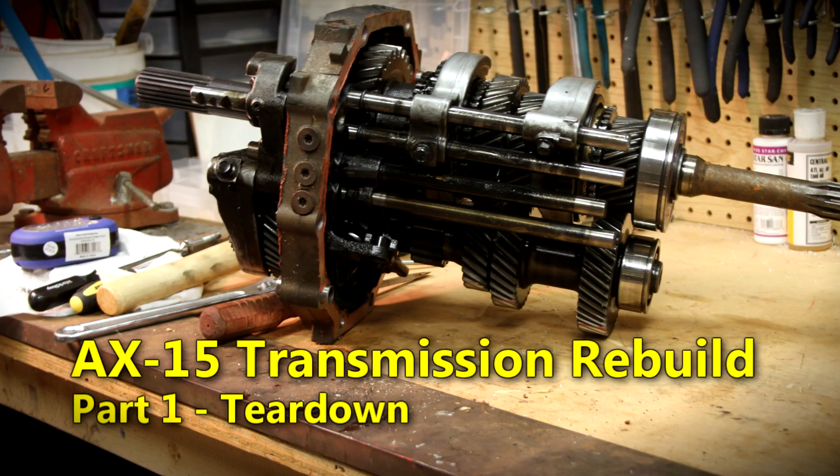Thoroughly enjoying fall weather, this Jeep with the top off, and I can't imagine taking it apart quite yet. So I'm going to start working on some of the major components.

I've gone ahead and sourced a transmission from Craigslist, and I've got an engine. We're going to actually jump in the shop right now and start working on the transmission. We're going to tear it down, look at what's wrong with it, rebuild it, put it all back together, and get that thing ready to be put in the Jeep when the time comes. So let's head back to the shop and get started on that transmission.

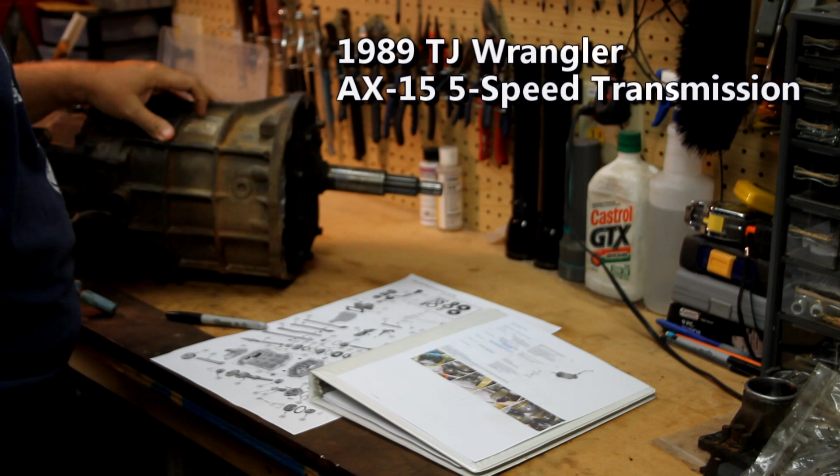Okay, I'm going to rebuild this AX15. It's out of a 1998 TJ Wrangler. It had 180,000 miles on it. Bought it on Craigslist, paid $160 for it. The guy dropped it because he messed up the reverse gear. He actually did open it up and took some pictures. He's very open with what was wrong with it, and it was exactly what I was looking for -- something to purchase and then rebuild. I've gone ahead and bought the master rebuild kit, as well as the reverse idler gear, which I know is broken, and I went ahead and bought the fifth gear. There's an upgrade to the fifth gear, so we're going to apply that as well.

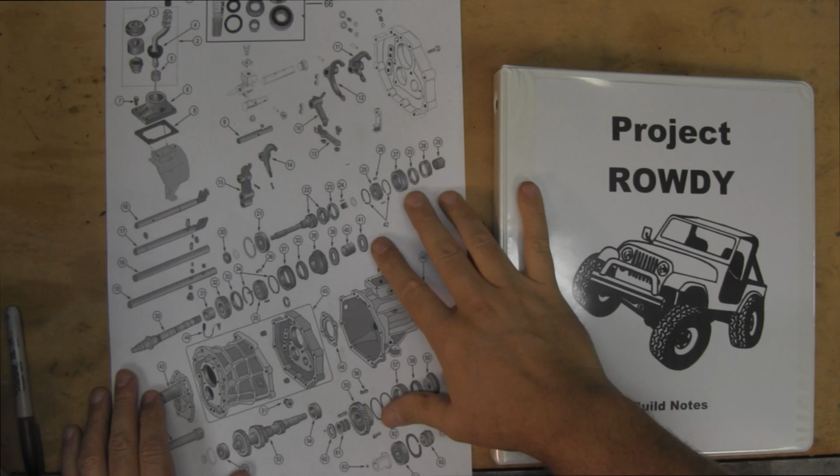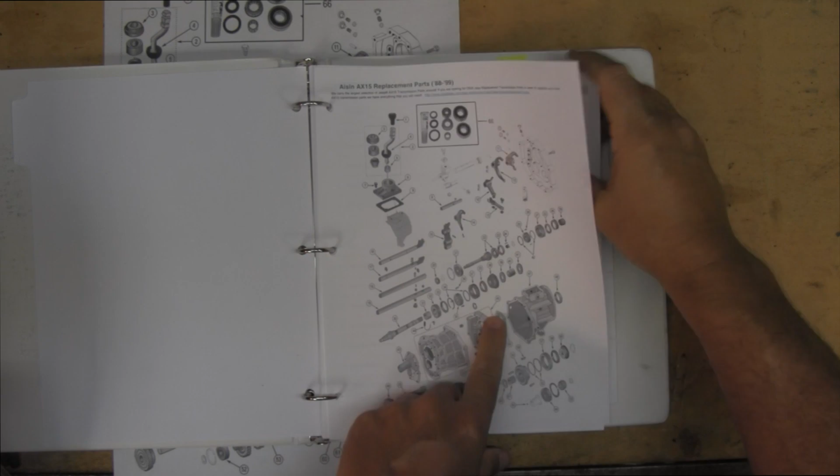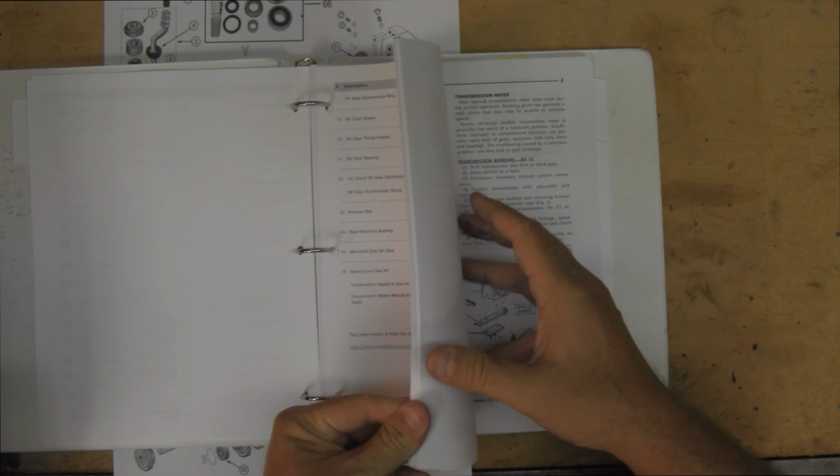Before we crack this open, let me show you some of the documentation I'm going to be following -- the repair manual, as well as some diagrams and other research I've done. Let's go over that. I found this nice exploded diagram of the transmission, so I'm going to have that on my wall for good reference, and I've replicated it. Here's a normal size version of it, but it's got part numbers, part descriptions, and prices in case I need to find things that are wrong as I tear this apart. We'll be able to figure out how we're going to need to replace that. Here's the main thing -- this is the service manual, and it goes step by step how to do this. I've read through this several times.

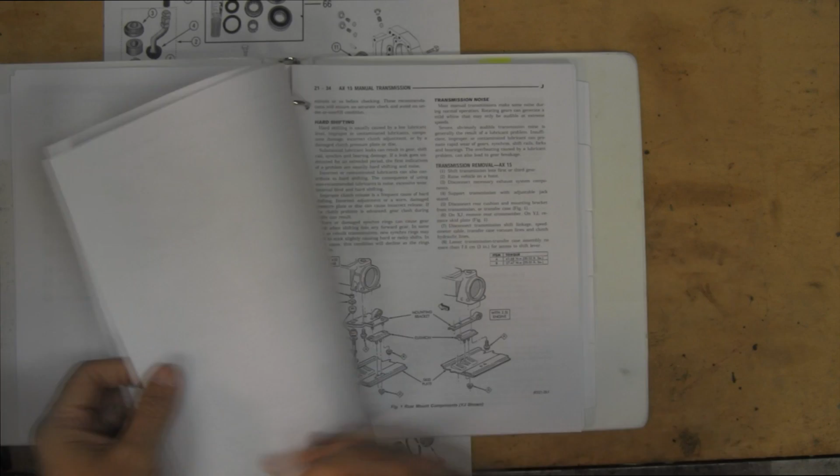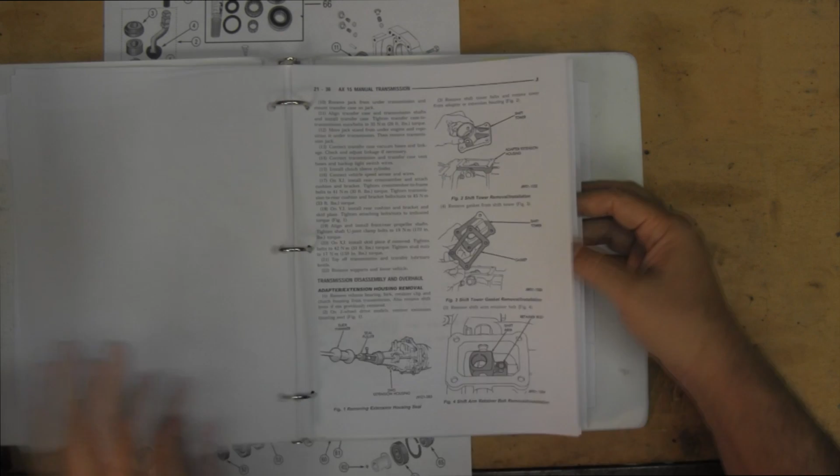I've got some recommendations -- I know we're not supposed to use GL-5 gear lube anymore. It hurts the yellow metals, specifically the synchronizers, so we're going to use something different. But interestingly, there's actually some things that are incorrect in here, so I'll go over those as I hit them.

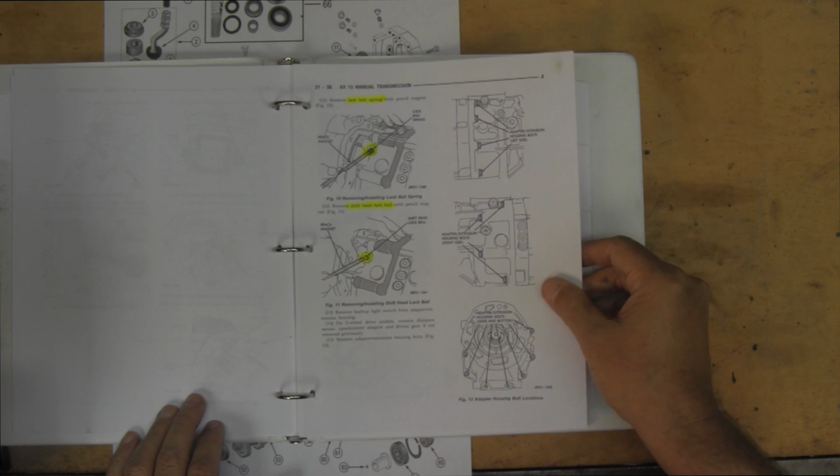This reminds me, there's going to be three things that I'm most worried about when I'm doing this. There's detent balls that will just fall out of nowhere, so you've got to expect where they are and how to deal with those as they show up -- I've got those highlighted in yellow. The other thing is just the order in which things go, and that's why videotaping is really important. I recommend videotaping anything you do, that way you've got a good record of how it came apart.

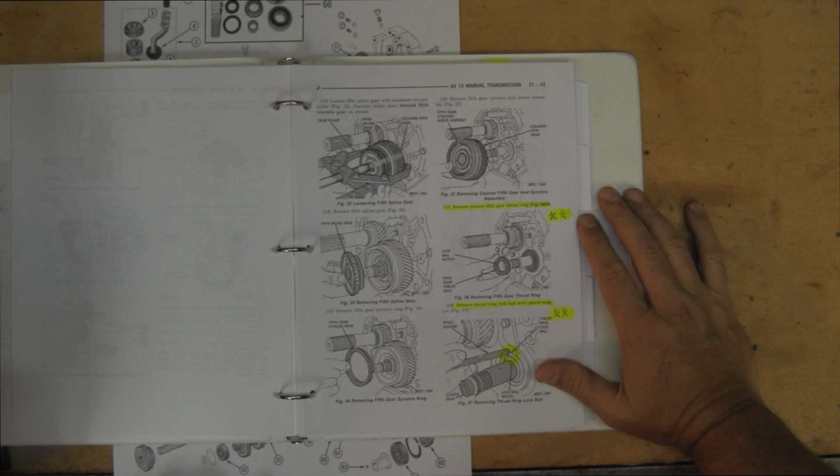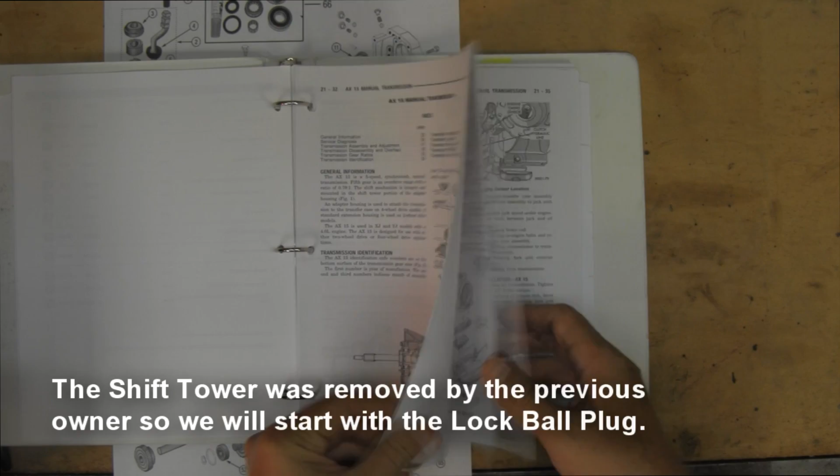The other thing I've got is I've actually got two shops in my local area that specialize in rebuilding these transmissions, so if I get into trouble, I'll be able to get their help with anything I need. So anyway, let's get started. We're going to follow this step by step and start taking it apart.

Alright, first we're going to take off this lock ball plug. Spring.

After further investigation, it doesn't appear the lock ball is in there, so I'm going to order that and/or keep investigating, make sure it's not up in there, but I've looked with a flashlight.

Now we're going to take off the adapter housing bolts. I'll look at these, make sure none of them are a different size. So that one came out of the top. Take them out. Yep, that one's longer. So just these two here were longer -- we'll make a note of that.

Okay, I'm going to put these in a special place to mark them, so I make sure I get the right size back on here from the rebuild kit. I'm just going to hang them in this spot. I'm going to take this off in case it's binding on something.

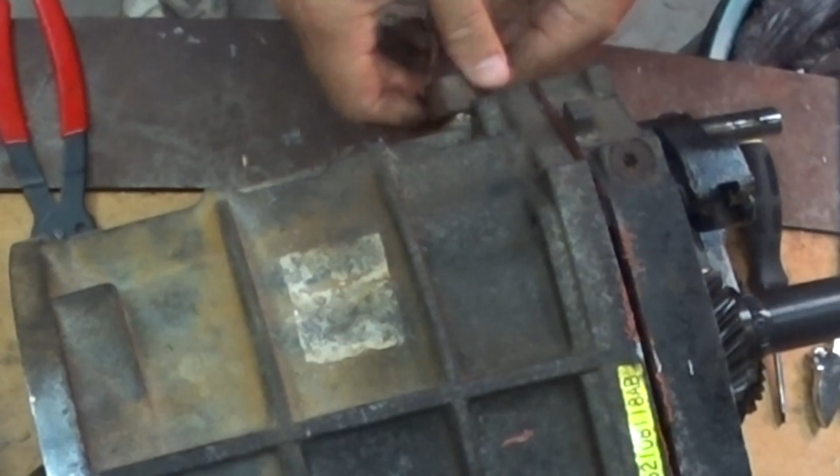Pretty loose -- this is the reverse switch. Can you help me hold?

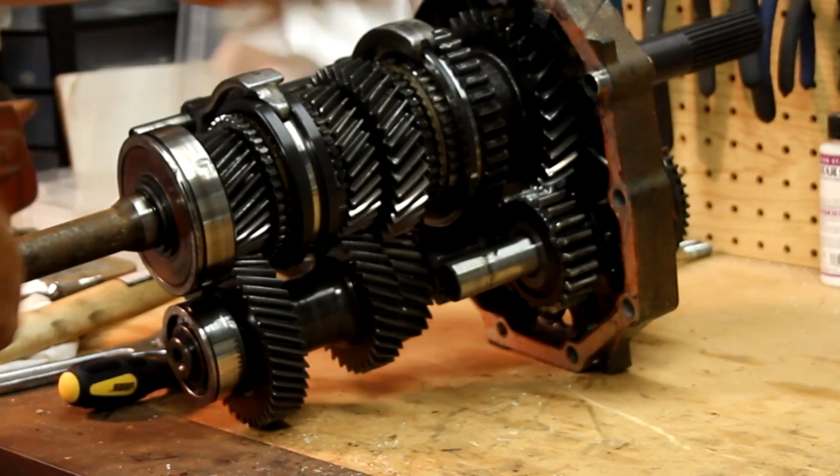Alright, let's look at the actual problem of this original. Was this reverse idler gear? Yeah, you can see where the teeth are gone. And my big concern is what that marries up to, make sure those teeth are okay. Here's the mating gear, and it's got enough issues that I'm going to have to order that too.

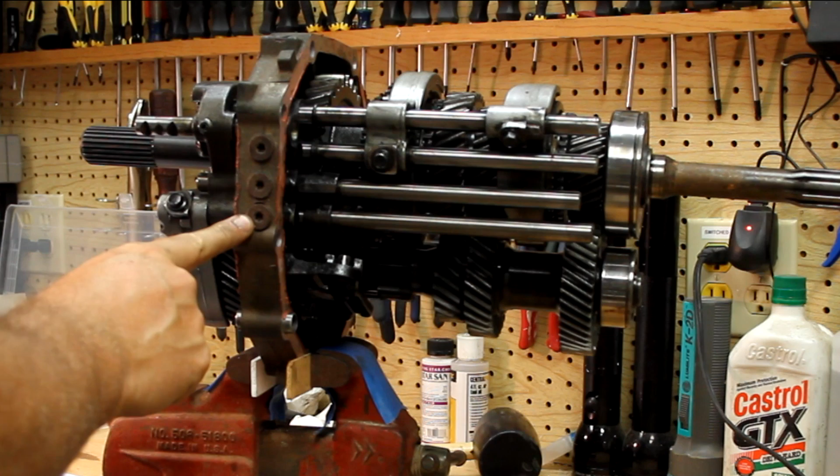Alright, next I got to take off these 3 detent cap covers. There's going to be a spring and balls under here, so we've got to be careful with the balls. We'll probably have to use a magnet to get those out. So let's get these broken loose. These are pretty rusted looking, so this may be a little bit difficult.

I'm going to sit them on the bench in order, then I'm going to look at them. I believe they're all the same. There's 3, 2, 1. Using a bolt to extend it because it's narrower, but it'll still go in and grab the balls. There's 1. There's 3. And there's 2. So since those are all the same.

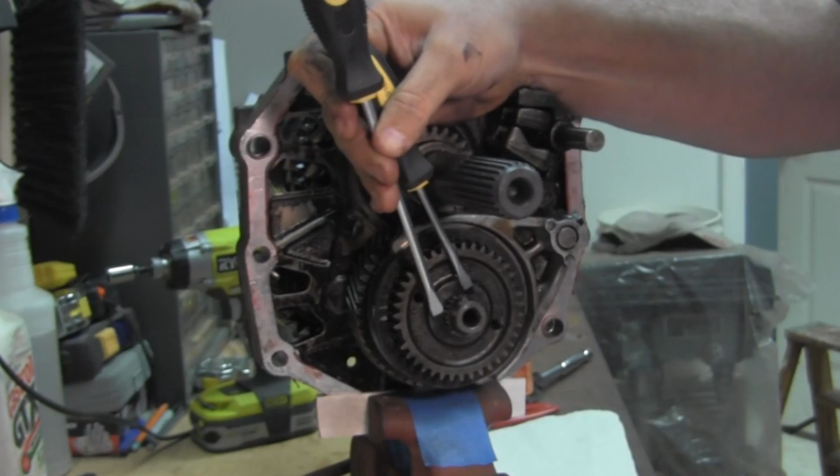Alright, next here is 5th gear. We're going to take off. There's a C-clip right here we're going to take off. Okay, got the C-clip off.

Okay, so back on the gear side, we're going to take off this little spring clip. It's an E-clip.

Okay, and now we need to take off these 2 bolts for this reverse shift arm. Remove the shift arm and shoe. Okay, so that just pulled off. All that looks pretty good.

Okay, so next I'm going to take off this 5th gear shift fork. Should be able to pull this out enough to get this fork off. Alright, so I'm going to mark this as 5th, and I'm going to put an arrow to the front of the transmission. Front of the transmission is that way.

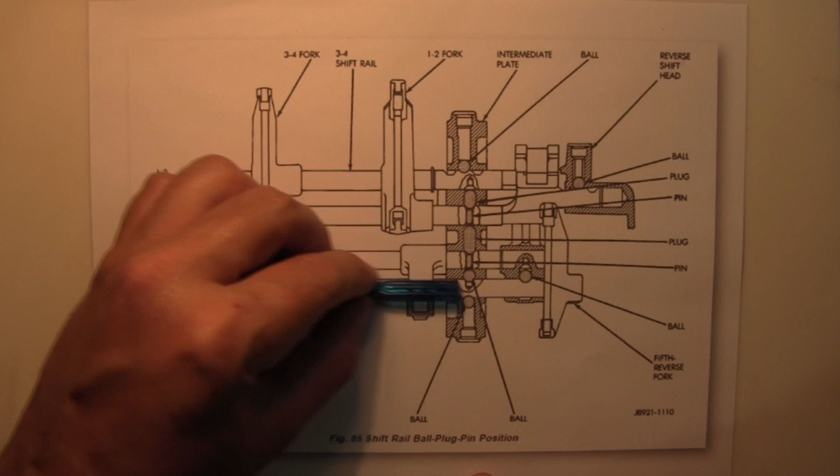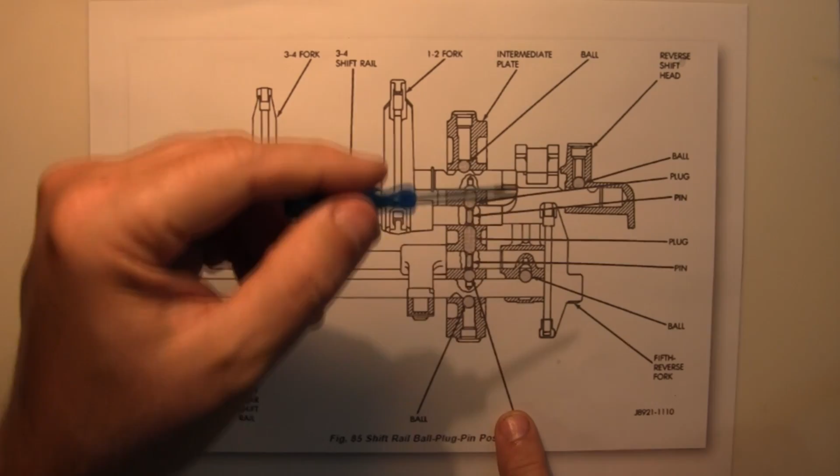Okay, hold the fort. Let me explain what just happened and what should have happened. A minute ago, we removed the 5th shift fork by pulling the 5th shift rail out a little bit, and then we removed this piece. The second part of the instructions, which I did not read, said the next step was to pull this shift rail completely out. I didn't do that. If I had, this ball would have dropped out. It's this ball that we're having a problem with. In normal circumstances, the ball wouldn't be there, and this reverse shift head rail we're trying to pull out now would just slide right out without any problem. So that's why I'm having the problem I explained.

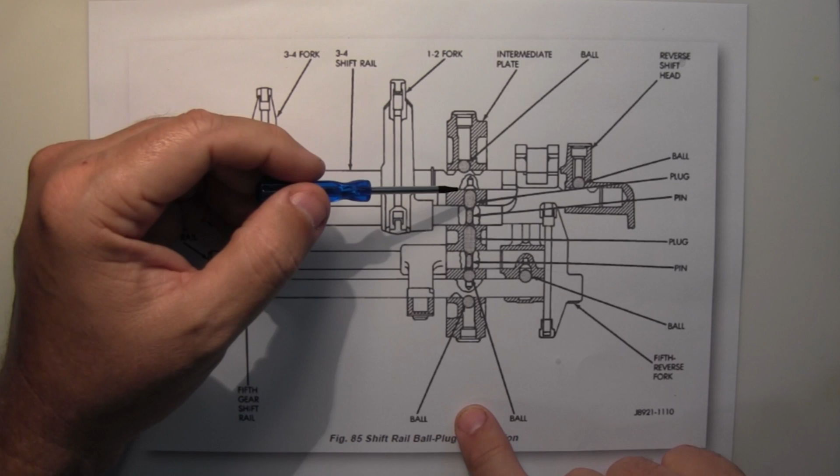But while we're here, this is really cool stuff. This is kind of the inspiration why I wanted to rebuild the transmission, to learn how this stuff worked. We always hear about detents, and detent means to detain or to hold or control. The detent system, this whole section in gray, is our intermediate plate, and in there there's basically a channel. It's got a bunch of balls, pins, and plugs that help maintain and track which gear you're in, and they basically allow you to shift into one gear, and once it's shifted into gear, it locks everything back up, so these rails cannot move left or right, so another gear cannot engage.

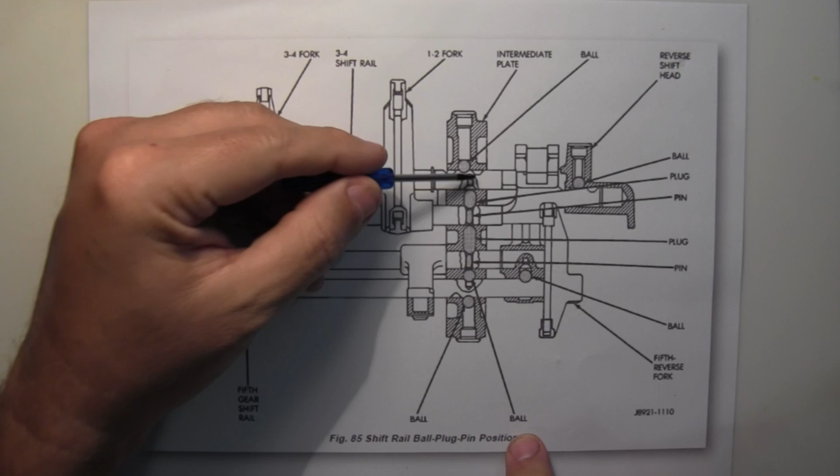If we look at the top, here's one of those caps we removed. This would represent the spring, and here's a ball. So this is a spring-loaded ball. This is the 3rd, 4th shift rail, and it attaches to the 3rd, 4th shift fork. 3rd gear being on this side, 4th gear being on this side. If this rail moved to the left, we'd be engaging 4th gear, and this ball would drop down into that little trough, and that spring-loaded ball in that trough would help keep the transmission in 4th gear so it wouldn't bounce back out.

When you shift this, right now these shift rails are all in a neutral position. The transmission is in neutral, and so any one of these 4 rails can move left or right. Once you shift one of these rails, any one shifts left or right, these pins and plugs shift up or down accordingly, and they lock the remaining 3 rails so they cannot accidentally shift into a gear.

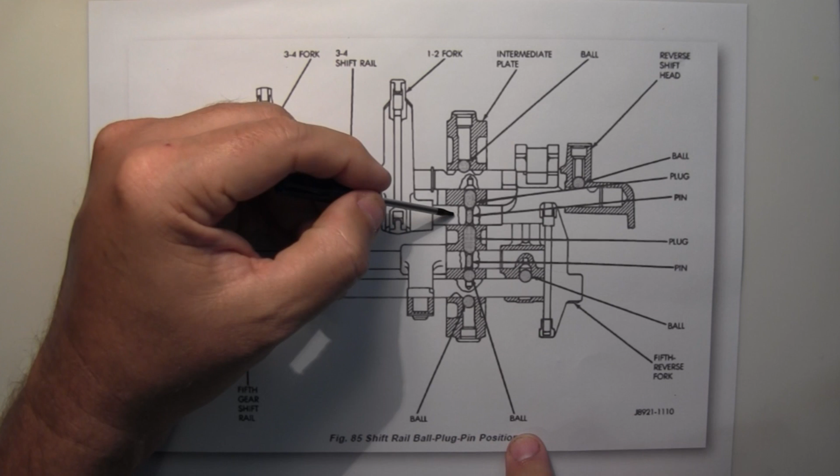In the intermediate plate, it's a bigger piece because they can drill a pretty big hole in here, and it's called a plug. In any of the shift rails themselves, they use a smaller hole and what they call a pin for that. But these all basically touch each other and shift up and down to help control or detent these rails from making anything go into multiple gears.

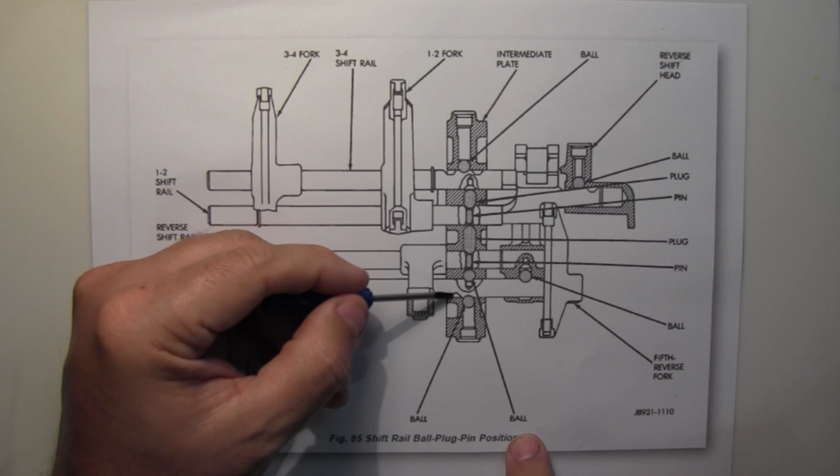Down here at the bottom, we also got a ball, a spring, and a cap. And it'll drop. There's a trough right there, so this would hold it, pushing it this way. That holds it in reverse, or it might be holding it into 5th.

This is the 5th reverse shift rail. So anyway, this stuff fascinates me, and this is why I really do all this stuff. So I thought I would share that with you. So let's get back to the teardown, and hopefully this explanation will help you understand what we're about to do.

Okay, so now I'm going to take off this reverse shift head and shift rail. There's a ball between these 2 shift rails, and it locks these 2 together. There's a little relief in this shift rail right here. I'm going to let the ball drop down into that, which will pull it away from this, allowing me to pull this piece off. So I pull this in. I heard the ball drop.

Now if I hold that still, get it just right. Let me find that hole again right there. Put it there. There we go. Now it'll come out. Now this ball is sitting in that groove. If I rotate that off, there's our first ball. But we knew it was there because of the instructions.

So I'm going to put these 2 pieces together over here. Okay, next we need to do a measurement.

Before we start taking it apart, we're going to measure the clearance between the 5th counter gear and the thrust washer, which is on this inside. And if you move this back and forth, you can identify where the 5th gear ends. And we'll look at that. We'll see that thrust washer here in a minute when we start taking it apart. But it's basically a gap that's right in here, if you can see the end of that pointer. And it needs to be between 3 thousandths and 19 thousandths.

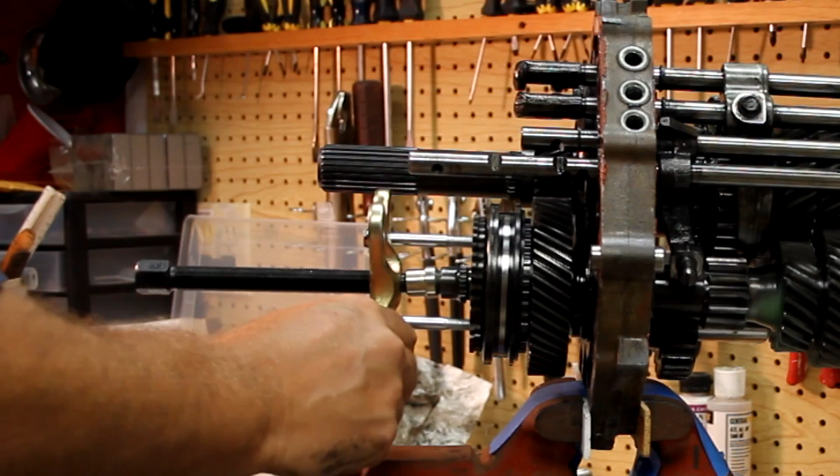So my 6-inch 3-jaw puller was too big to get behind these gears, so it just didn't align right. So instead of that, I'm going to use a harmonic balancer puller.

Okay, as I take this apart, orientation's pretty key. The diagram does a great job of showing which way these things go back together, but there's a 5th spline gear, the 5th synchro ring. That still has a little bit of break to it, so that's okay. Obviously it's going to be replaced.

As I pull all this stuff off, I'm going to set it on the table face up, goes on the shaft first. So this will be sitting on over here, that way. Got a bearing inside here, synchro hub, and the counter gear. Again, I'm going to set this face this direction.

And then here's the... Okay, so this is that thrust sleeve. This is the one that we were measuring the gap between this and that counter shaft. And then there's a ball right there. We need to get that ball. So set this over here. That ball is going to go over here.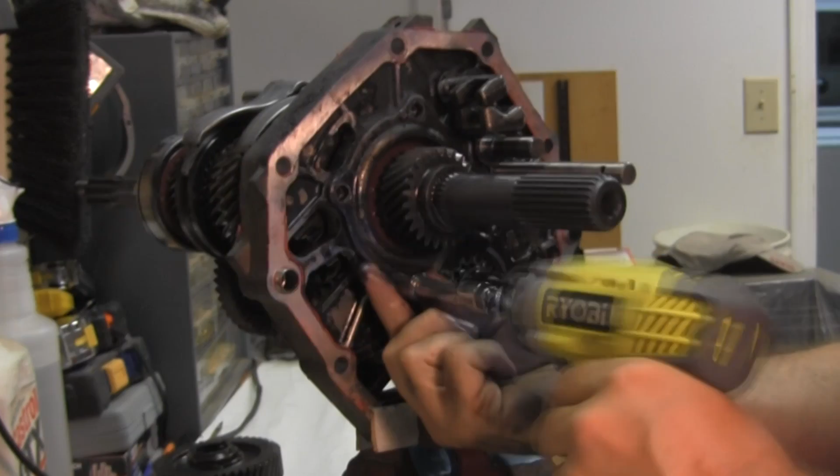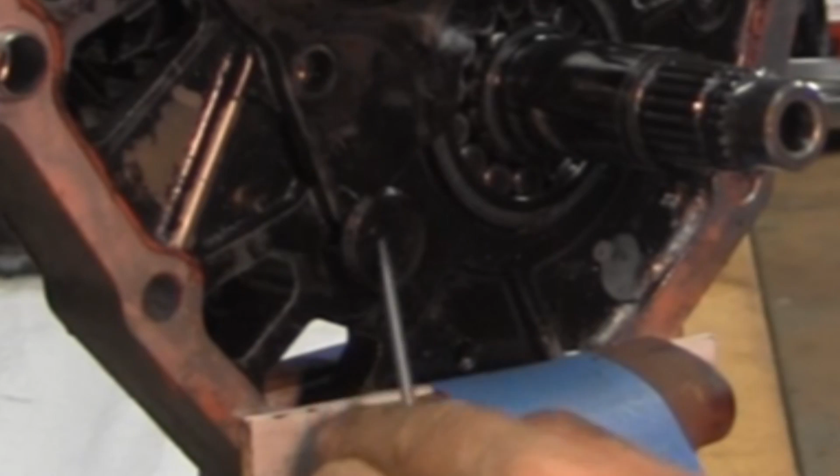Next, I need to take off this bearing retainer. Now you'll see right here, there's this plate that actually locks into this shaft here. We'll have to make sure when we put this shaft back in that this plate gets back into that sleeve at that point right there.

Okay, and with that removed, now I can remove this shaft and this counter gear. That's the gear that actually messed up, and that's the main reason we're rebuilding the transmission, plus 180,000 miles.

Alright, so the next part is going to be taking out the shift rails and the shift forks, and one of the most important parts here, again on the caution side, is all the balls and plugs and pins that are in this section that basically manage these right here at this intermediate plate. There's a cap here we're going to remove.

It's got a spring and a ball. And then there's pins and plugs that go between all these on this side here. And so as we remove these things, we need to make sure we're doing that slowly and removing those balls and marking which position they came in. They're all different sizes.

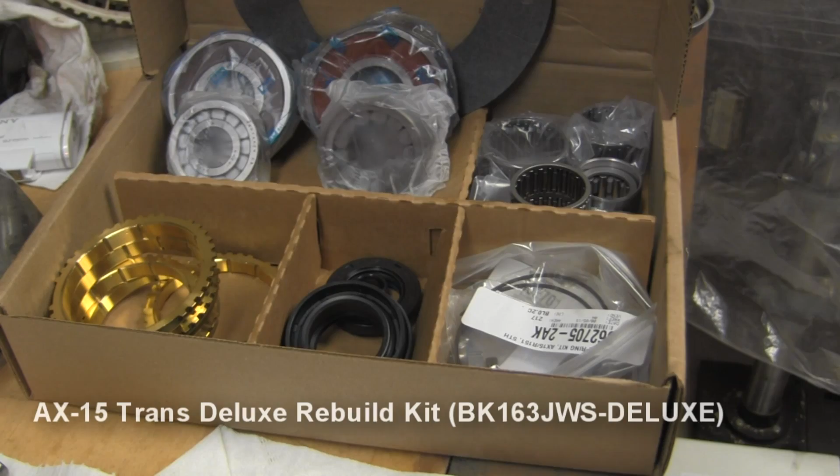Okay, this is the AX15 Transmission Deluxe Rebuild Kit. It's got all those major bearings that are on all the ends of the shafts, the cluster shaft and the input-output shaft, as well as all the bearings needed for each of the different gears, springs, and the little clips that go in for the synchro hubs.

All new seals, spring-loaded, little spring in there, and then here's all the synchro rings. Came with 5. I won't use one of these only because the new 5th gear that I bought came with its own, so I'm going to keep that all matched together. Let me let you look at that.

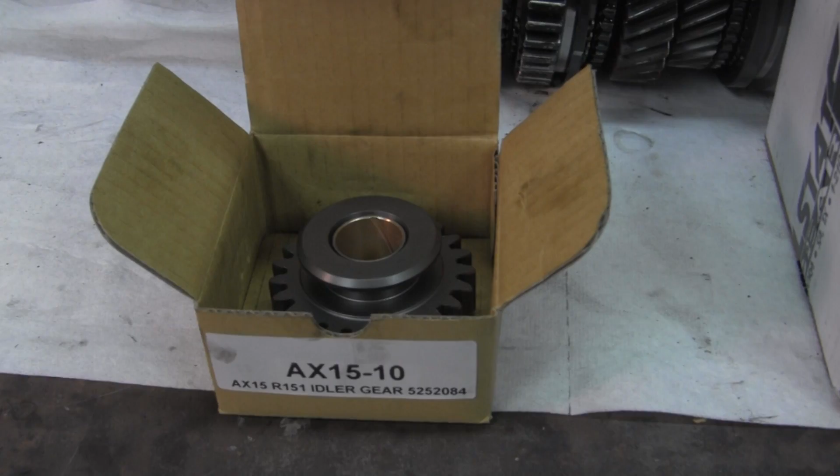This is the new reverse idler gear, AX15-10 idler gear. Got a part number there and all. So that'll replace, I knew that piece was bad, so I knew I needed to have that. I went and bought that early.

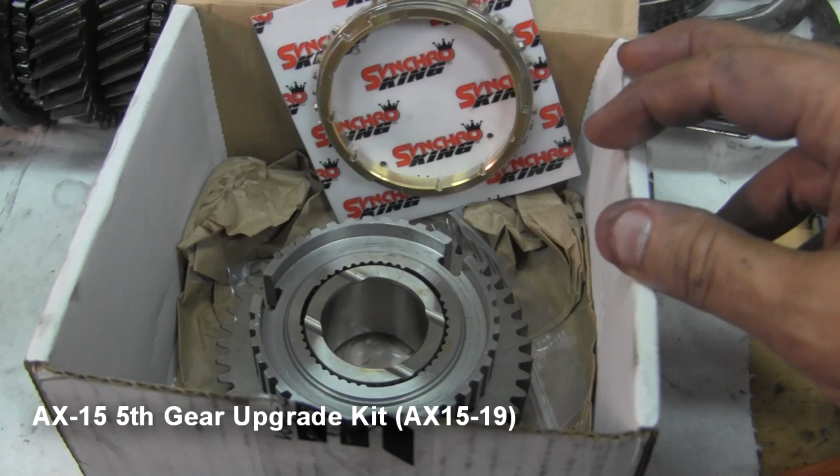And then this is a 5th gear upgrade. I'm not sure, I could not find exactly what was wrong, but they were saying that if you're doing your 5th gear, you might as well have this. I went ahead and bought it. This is before I ever opened the case, but it actually comes with this hub as well too, and it came with its own specialized synchronizing ring. So I'm going to use this one versus the one that came in the other kit. Keep that all together. So I do need to buy one more part.

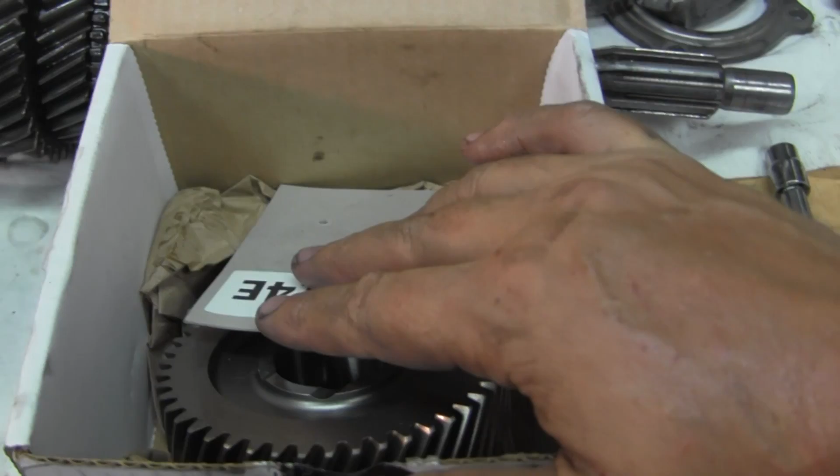I'll buy that reverse gear, and once that comes in, we're going to get all this assembled.

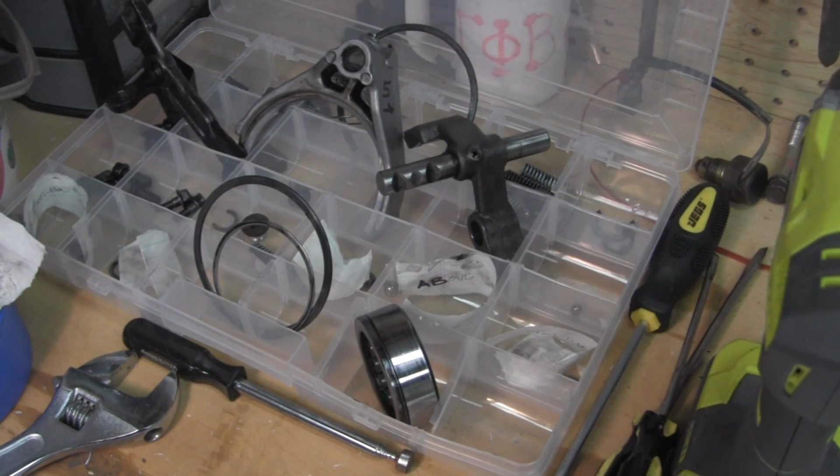And a final note on organization. I bought this little cubby cube thing and basically started putting things in this box as I took them out. Added some labels where I needed labels, but I basically started at that top corner. As we went through the instructions, I went chronologically through this bin, putting the parts on. When I needed to, I put little notes in there so I know what step they belong to.

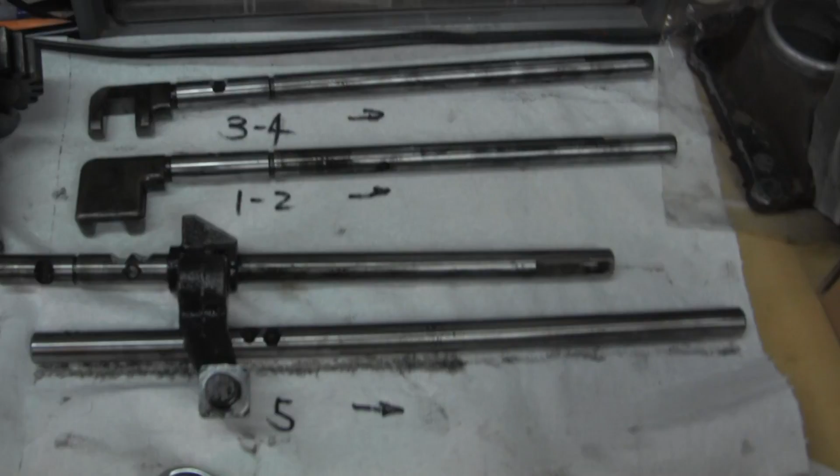So for reinstallation, I'll just go backwards through the little box. Between that and over here, I've got the shift forks, and the arrow points to the front of the transmission, so I know which direction those go in. A lot of them are okay, except for this one here doesn't have anything on it, so it can only go one way. But that's how I kind of organize things.

And again, when I start pulling these gears off, there's going to be a method to my madness on keeping those in line and all the parts. Plus, I've got that exploded diagram, that's really going to help. I looked at it really detailed, and it does show direction and stuff like that. But I'm still going to be very cognizant of that stuff. The worst thing would be to put something on backwards and it not rotate. Jack it up.